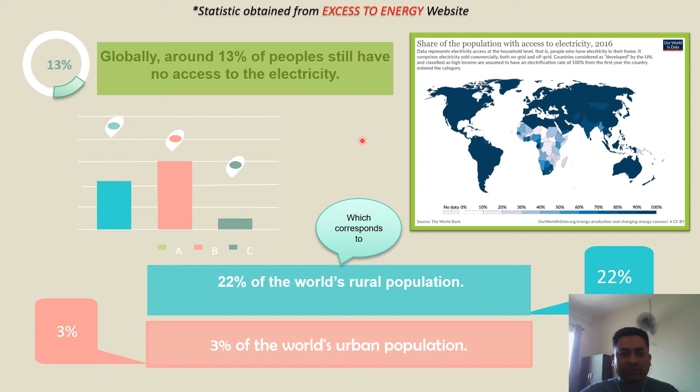The statistics from the renowned website Access to Energy show globally around 13% of people still have no access to electricity, which corresponds to 22% of the world's rural population and 3% of the world's urban population. This number is much bigger in third world developing countries, which leads people to use either fossil fuel or renewable energy as their primary source of electricity. So it is clear a big number of people still have no access to the utility.

Because of the reasons mentioned in the previous slide, the number of small distributed generation like small PV systems is significantly increasing. A small country like Bangladesh has already installed 4 million plus solar home systems, whereas 2.5 million houses and 45,000 commercial buildings in Malaysia already have solar PV systems installed.

Now the problem is these 4 million solar home systems from Bangladesh are losing a very significant amount of energy every day - 60,000 kilowatt hours every day due to insufficient storage capacity. This amount of energy could be used to power 2.5 million more people.

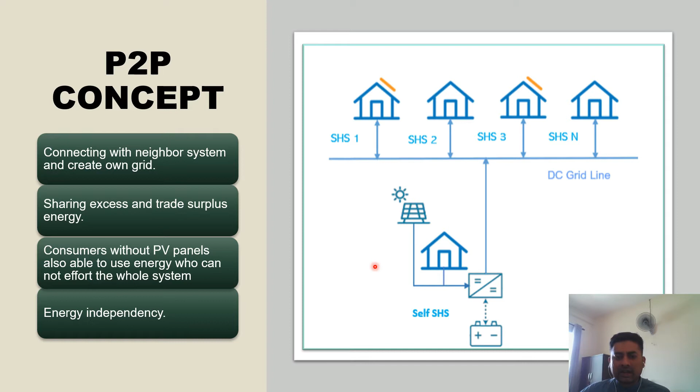So now the concept is very simple. A single solar home system can be connected with neighbor systems so that they can share and sell their excess energy to the neighbors.

In this section, I will discuss the methodology. The project has been divided into two parts. In the first part, an automated energy sharing system is presented. In the second part, the feasibility of P2P will be discussed.

This is the system architecture of individual solar home system, showing how they interconnect with the network. To design the effective automated energy sharing system, the solar home control system architecture has been divided into several blocks: solar panel blocks, charge controller blocks, battery blocks, and load blocks.

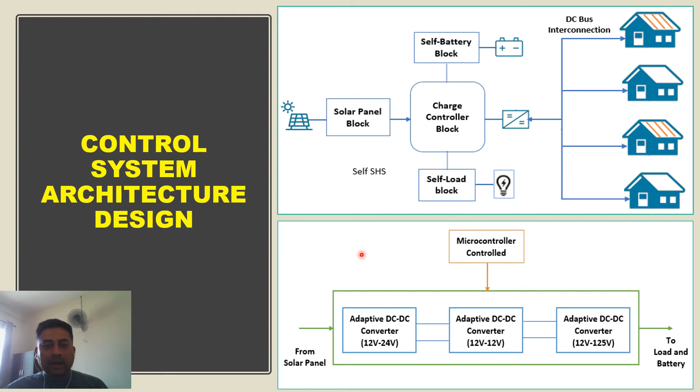As mentioned in the previous slide, the microcontroller is used to control the power flow from the solar panel to the appropriate direction. This is the algorithm to design the microcontroller. Initially, the microcontroller will check all the conditions.

If panel voltage is available, the panel will supply to the load. At the same time, the microcontroller will check the battery state. If the battery's state of charge is less than 90%, the battery will charge from the solar panel. Otherwise, the extra solar panel voltage will go for sharing.

On the other hand, the battery condition is checked. If a significant amount of battery voltage is available, the battery will supply to the load. Otherwise, the microcontroller will check the grid availability. So this is the basic concept of the algorithm.

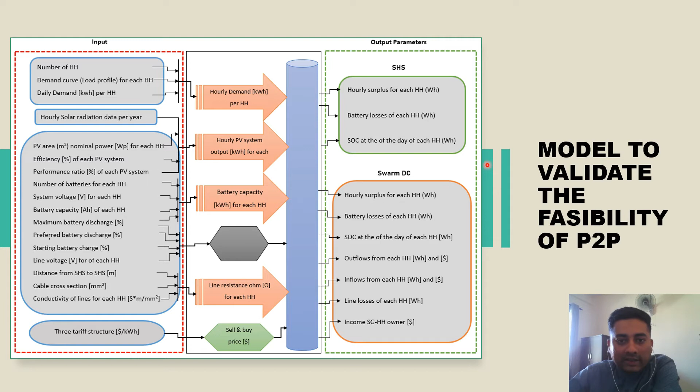This is the model to validate the feasibility of P2P, where I use very renowned PV sizing tools, PVsyst and Homer, to collect all the necessary data.

Now I explain the results of what I achieved in this project. This is the simulating model of the battery controller, what I mentioned in the methodology.

I use a DC voltage source as the solar panel. This is the load for all sources. This is the bidirectional DC to DC converter, and this is the battery.

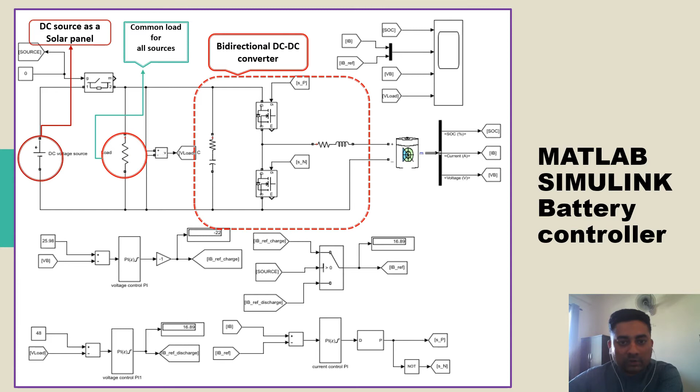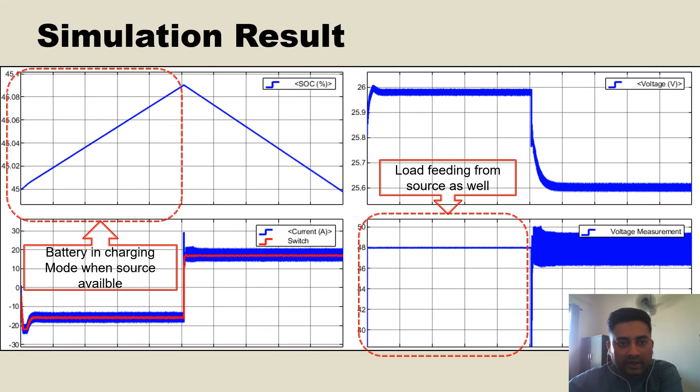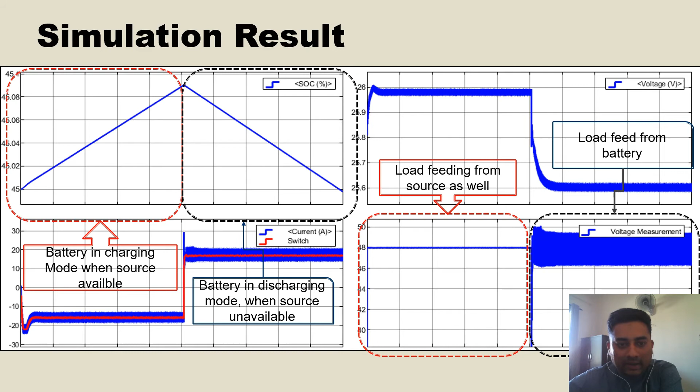Now I explain the simulation result. When source is available, the source will supply to the load, as well as charging the battery, so the battery will be in charging mode. When there is no source available, the battery will feed the load, so the battery will be discharging instead. This is the simulating model in MATLAB.

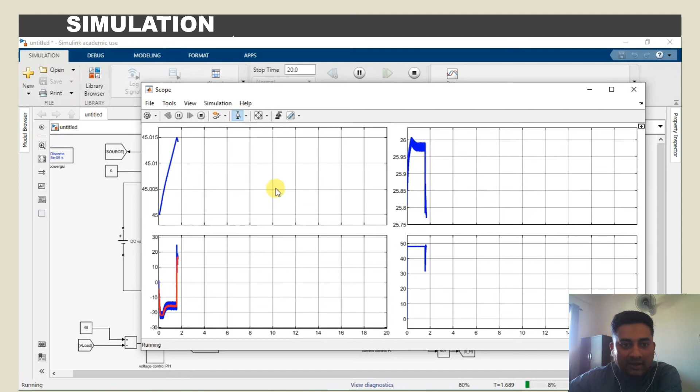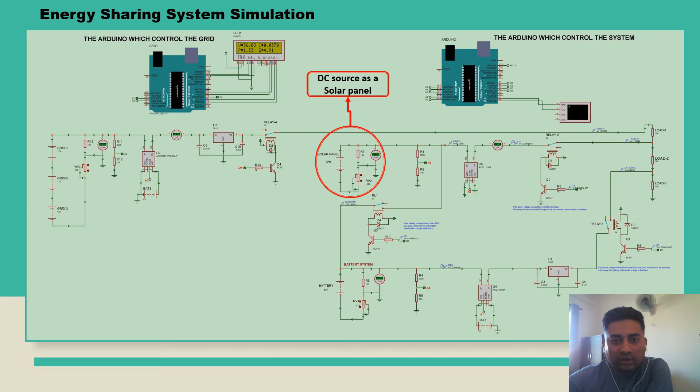This is the hardware simulation of the energy sharing system. DC source acts as the solar panel. This is the battery system. This is the DC grid network. These are the four relay switches to control the power flow. I use a potentiometer to show all the scenarios.

This is the energy sharing system simulation result.